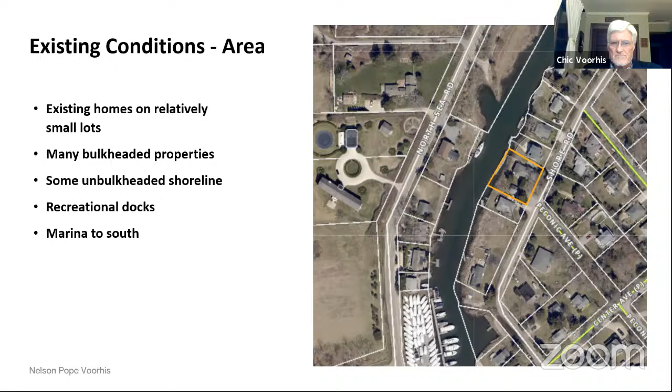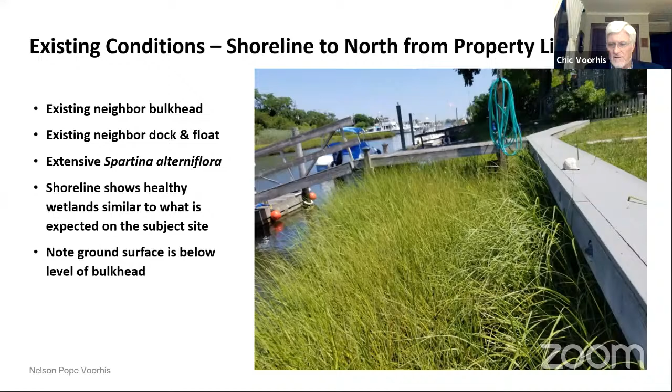The shoreline shows healthy wetlands, and this is similar to what we would look to achieve and look to retain on the subject site. Also you can see that the ground surface is below the level of the bulkhead, which is clearly visible. This is that same property, just looking at it from my client's dock, showing again the extensive wetland vegetation, bulkhead, the recreational boat use by the neighbor to the north, and healthy wetlands.

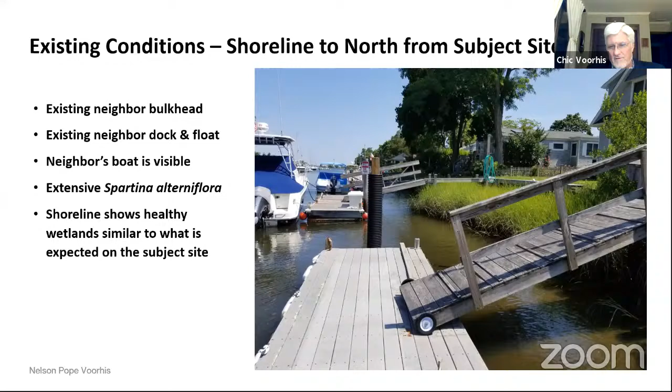This is pretty much the same. It just has a little better view of the existing boat dock that is being used by the neighbor to the north. This image is from the subject property looking north.

And this shows an existing bulkhead. Also Spartina alterniflora right up to the bulkhead. Also a fixed dock, a small ramp, and floats that are used for recreational access. The shoreline is healthy in terms of the stand of tidal marsh, and also the ground surface is below the level of the bulkhead.

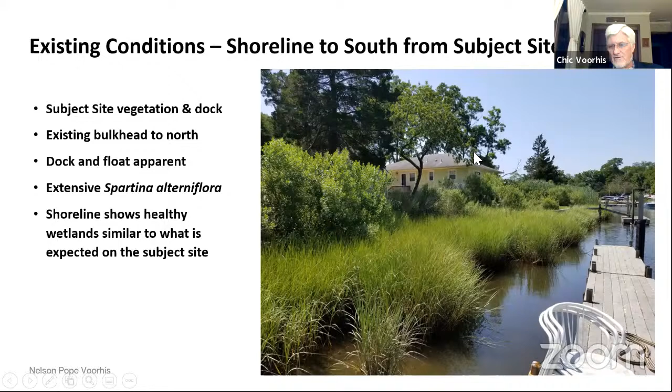This is just another view. It zooms out a little. It's from Mr. Nardi's dock itself, and you can see the bulkhead. You can see the frontage of this subject property, and you can see the recreational pier immediately to the south.

It would retain the existing intertidal wetland vegetation. And as I said before, structures have been addressed through the payment of a penalty through the permit process so far.

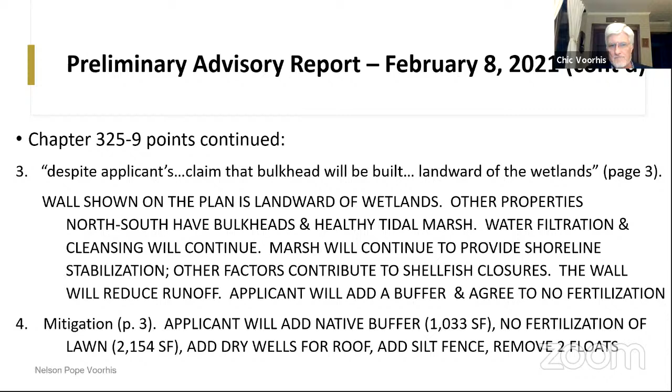On page 4, the advisory report references a pool. I've done this before as well—it's obvious it was a typo left over from another report. So no offense taken, but I just want to clarify for the record that there is no pool proposed with this application.

The next point had to do with the project not being necessary to enjoy or profit from residential use of the site, on page 4 of the report. As I've indicated, both neighbors have bulkheads. The Nardi property is unfairly restricted, in my opinion, and the flooding impedes the use and enjoyment of the property. In terms of profit or economics, the value of the property would be enhanced with a wall.

I'm just looking to address what I saw in the advisory report, and I feel that this is a more accurate characterization of these factors.

On page 4 of the report, it talks about alternatives, and I can tell you, obviously, we've adjourned the hearing a number of times. We have looked at alternatives in this time period. We've looked at FOIL requests. We've looked to improve the project. So my apologies for adjourning.

I do want to tell you that my client does have a cost to raise the house, which would be $94,000 in that range. It's about 1/6 of the purchase price of the home. The proposed project would be about half this cost. So just for comparison, we have looked at those.

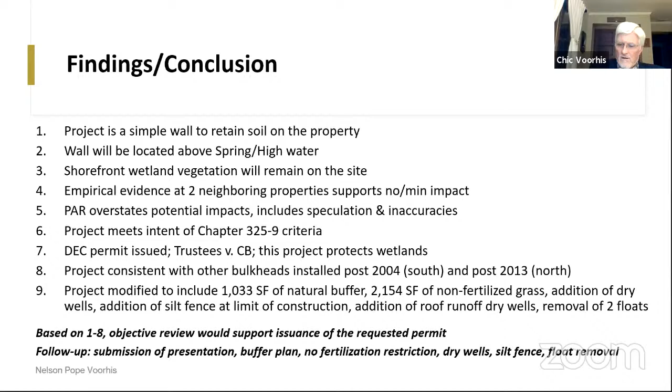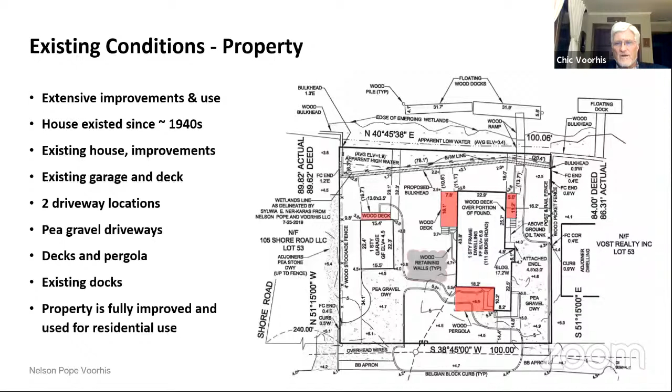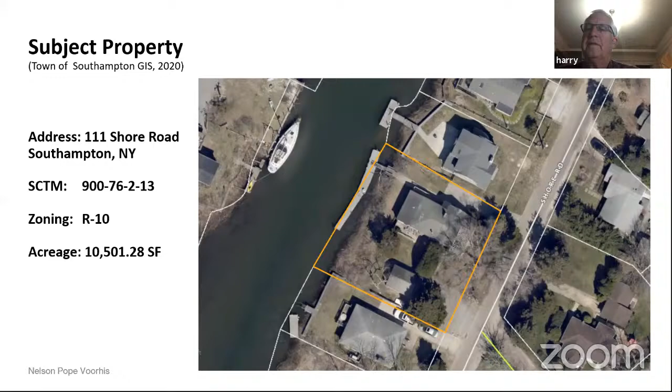Would you put your chart back up on the screen that you showed before, that shows an overhead picture of the property? Certainly. The other one is better because I'm looking for the lines and the location of where you want to put things. Here is the driveway connection to the street. Everything else is shown on this.

So would you talk a little bit about the flooding that your client has experienced on the property? How often is that experienced? Is it cyclical, or occasional? And where does the water come from that floods?

If we can, I'd like to have Mr. Nardi address that. He lives there, his father has lived there, and he is most familiar with it. Mike, are you on? Yes, I'm on. Can everybody hear me? I'm sorry for the technical difficulties.

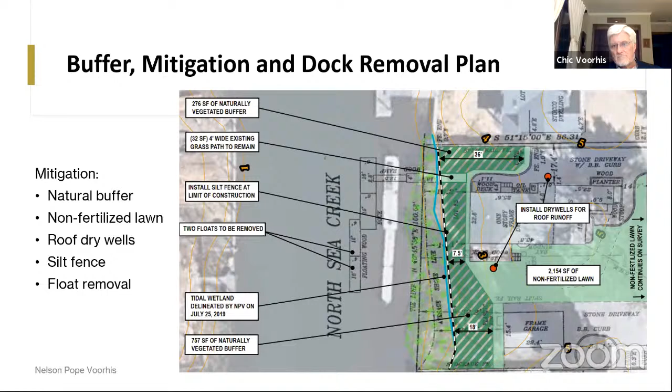So whatever we need to do to solve that, I'm all for it. I want to preserve the environment. I want to preserve the wetlands. I'm not looking, again, to sterilize like they do down in Florida where there's no nature whatsoever. It's just bulkhead after bulkhead. So, you know, we do have a serious problem over there. And when you go up and down the creek, yes, there's certain houses that do not have a bulkhead.

They also may be higher up than this particular property from an elevation perspective. But up and down, I think there's about 32 different properties that have a bulkhead out of the 40 or so that are there. So it's a significant amount of properties that are already bulkheaded, pre-existing, non-conforming obviously, but they do have that protection that this property lacks. And so I could work with Chic to see if there's other things that we can do in moving the bulkhead proposal and things like that. So we could take that as a takeaway.

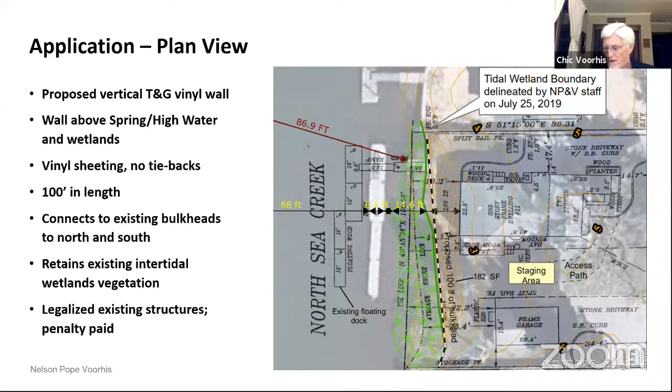We're looking at the current condition, but if you project ahead, I think you can reasonably expect a lot of changes to wetlands on Long Island. It's very disturbing, and there's not a lot of room here for landward migration. So short of removing the house, it's difficult to conceive how protecting this property is going to have that type of impact. Regarding comments about the neighbors, they do have elevated properties, and that's one of the reasons this one is really the weak link, which is why we proposed this. To answer one question, we were looking to establish the bulkhead at a similar height to the neighboring properties. That's all I have to say.

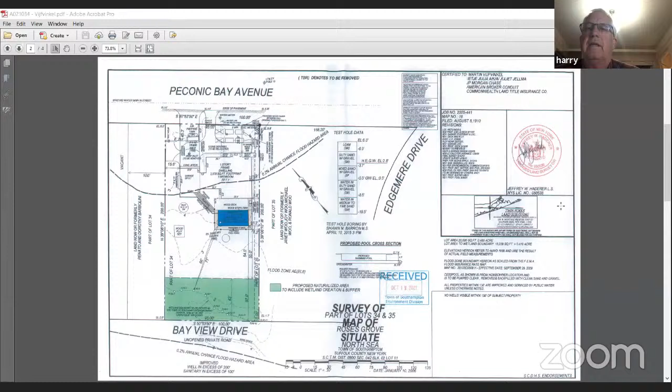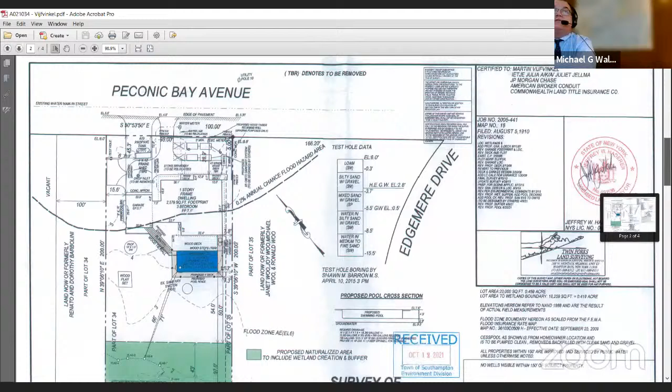My screen is not large enough for me to read all the details on that survey. Would you just explain to the board what the green shaded area represents? If I may, Mr. Chairman, Bruce is the technical guy on this one. If you don't mind, he could come on board and show you what's on this plan. He prepared it.

Good evening. Bruce? Can you hear me? Yes.

Okay, let's go to the plant plan. I'm just going to lay out my exhibits because they're all in one file and it's easier, and I ask you to share the screen. My question, I don't know if you heard it, but I'm going to walk you through the survey, okay.

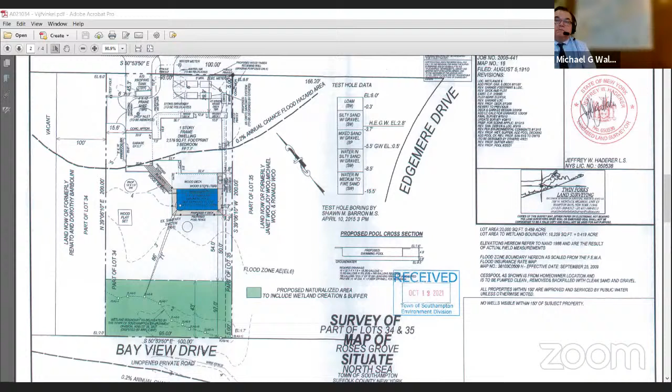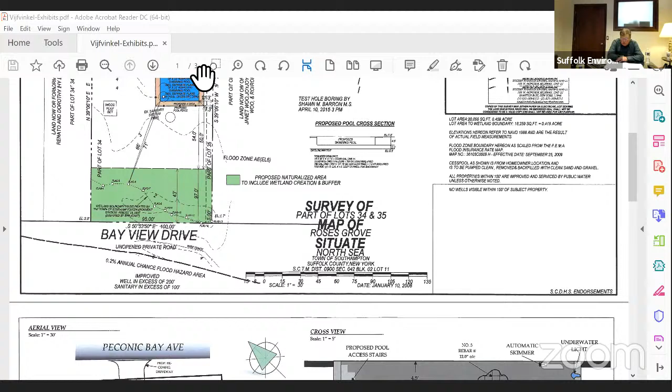Charles, you may share the screen. Thank you. All right, we're going to go to the survey first. This is a survey prepared by Jeffrey Haderer. It is dated...

9/20/21. It was submitted because during our last hearing in July, the chairman requested that we explore rotating the pool 90 degrees, which we have done.

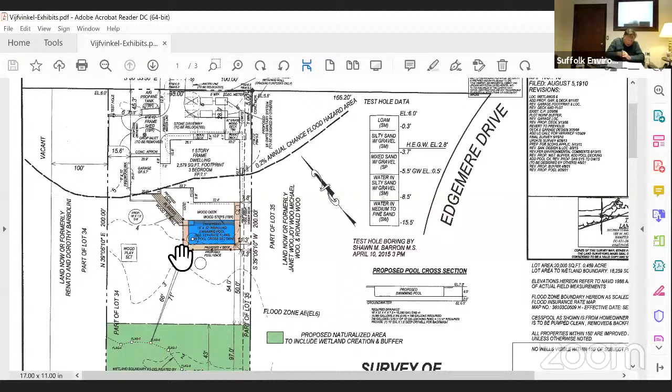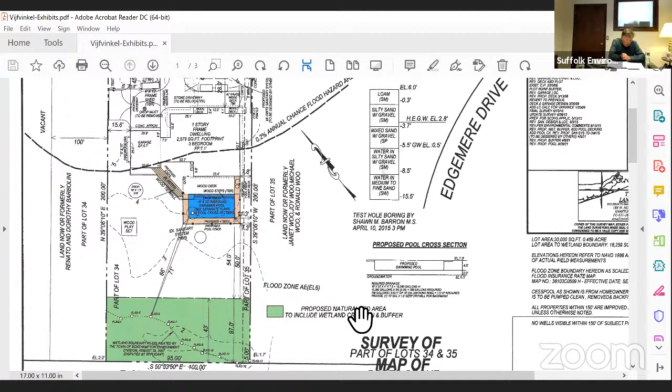The pool is sited 97 feet from the rear lot line, and we intend to take 43 feet of the area of the lot between the rear lot line, which is a town unopened road known as Bay View Drive, forward towards the front by 43 feet. This covers the area of dispute in which we assert there are no wetlands, because the nature of the vegetation is such that one can't classify it as wetlands, nor can one delineate its wetland boundaries. There are mountains of proof to that effect.

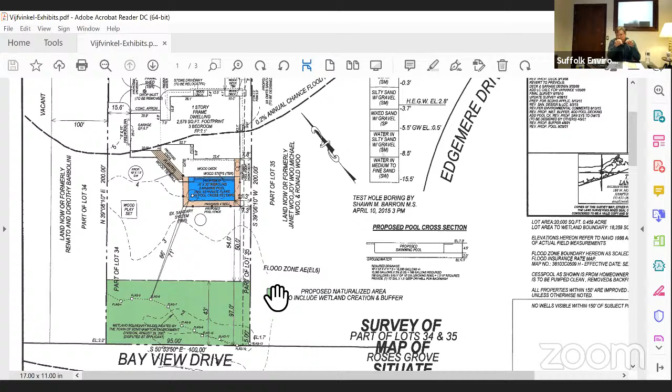If we go to the next screen, please. So this is the basic site plan depicting the same thing, and what you'll see is a proposed revegetated buffer area.

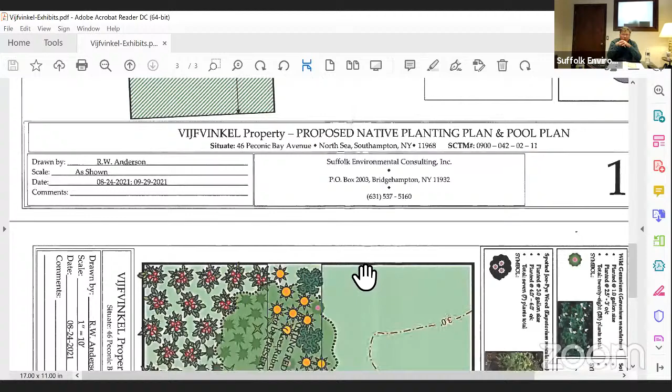And if we shift further down, you'll see this is a planting plan. That planting plan consists of numerous wetland plants, such as blue flag iris, soft rush, Joe Pye weed, swamp rose mallow, but it also contains bayberry, wild geranium, and others. So it's a native mix of planted materials, which the applicant is agreeable to do.

If one were to evaluate this plan versus what's out there today objectively, there would be no question in anyone's mind that this plan is superior to what exists today, because what exists today is, A, uplands, and B, dominated by invasive species, particularly multiflora.

When you consider what's there today, it is almost impossible for the objective reviewer to look at that and, A, consider it a wetland, and B, try to sterilize most of this fellow's backyard, because you're not buffering anything. There's nothing to buffer here. So this is what we've offered.

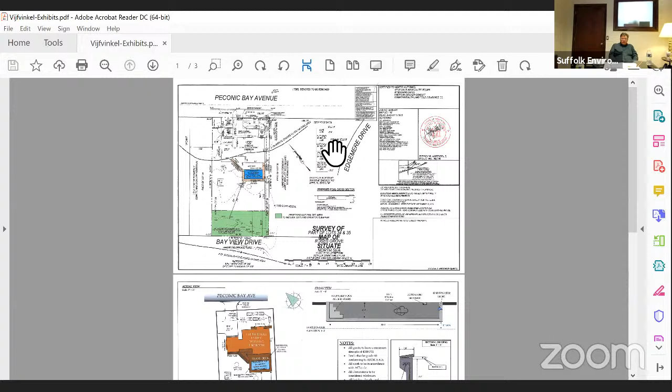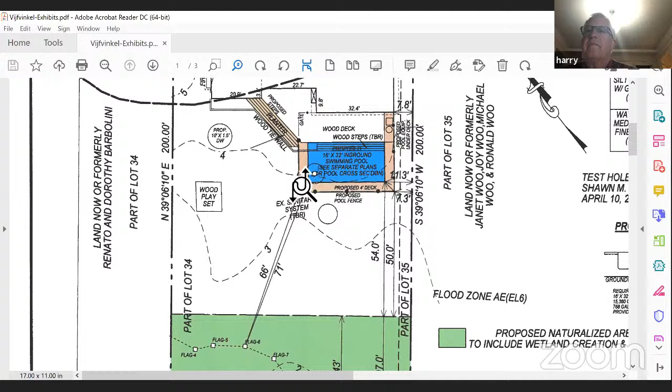So Bruce, would you pan out on this current screen so we can see more of the property? I'd like to see the back of the lot to the deck. Yeah, the original survey that you submitted probably has that. Okay, go back. Hold on. You had it up before. Yeah. There it is. Okay, and zoom in a little bit more if you would. Okay, pan out just a click, one click out. Yeah, that should be good, that's good.

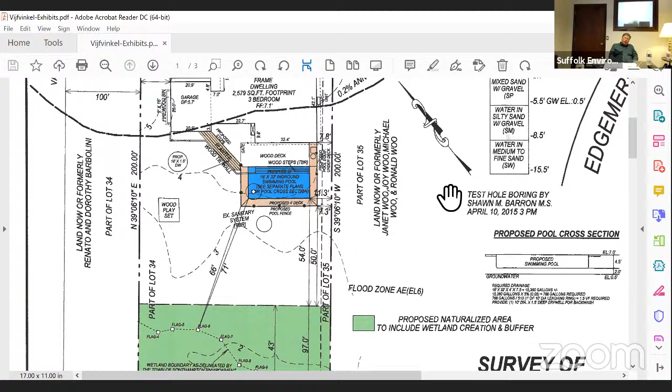So my recollection, as I look at other historical surveys, there are two trees, I guess. Is that what they are? One on the corner of the proposed pool, with a white dot in the middle of it? No, that's the sanitary system. Oh, okay, there's two cesspools, and we would replace those cesspools with an IA OWTS system between the house and the road. And then there's another circle just outside the pool, that's also another cesspool. So I'm using that, not because it's a cesspool, but as an identifier for the space.

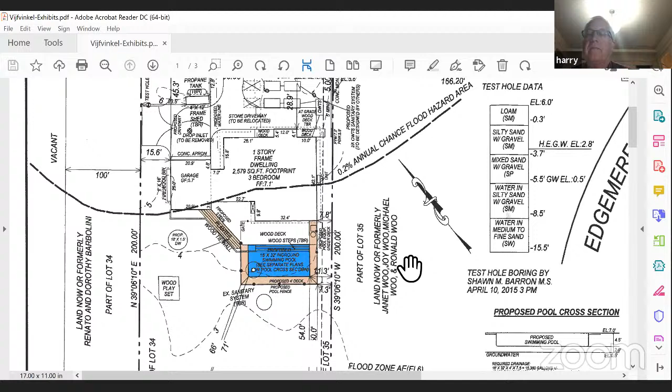The survey that I've looked at before shows that the historical buffer zone extends from just seaward of the more seaward sanitary circle to the wetland line. So to answer your question, Jim, there is a fairly significant amount of space. It's about another 32 feet, basically. So it's currently 32 to 43 to 75. Yeah, that's currently encumbered by a covenant, a non-authorization covenant.

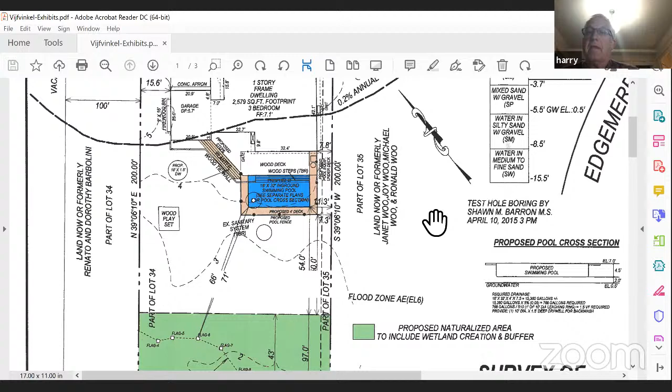Okay, so at this point, Marty, would you speak? Yeah, I'd be happy to. Marty Shea, Chief Environmental Analyst for the town. First, I would offer that the applicant's testimony is a mischaracterization of my intent and my communications with the applicant.

As the applicant well knows, I have been working with them to find a way to issue a permit to construct a swimming pool on this property, and looking to resolve what I see as remaining outstanding issues in order to get to that point.

With regards to the town's determination that there are regulated wetlands on the property, as this board well knows, the applicant had appealed the town's wetland determination and also sought to get the existing covenant deemed null and void through that appeal application. That appeal application went to hearings. My office submitted very significant evidence in support of our finding that there's regulated wetlands on the property. The board considered that evidence and denied the appeal, and found that yes, there are regulated wetlands on the property.

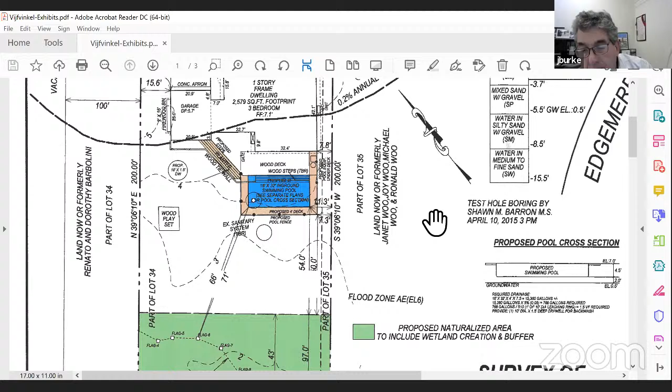My last emailed communications with the applicant regarding the revised plans occurred on October 12th. One second, Marty. Bruce, can you take down the survey so Karina can put up what Marty's referring to? Thank you.

Contrary to the applicant's testimony, I've got my email on the screen right now. I started by saying I'm pleased to see that the swimming pool plans have been modified so that the pool would be oriented west-east rather than north-south, as such alternative design has significantly increased the wetland setbacks for the pool. So number one, I came out in support of their reorientation of the pool.

Consistent with the board's policy for other constrained properties where significantly less wetland construction setbacks are sought for a pool construction, I did ask the applicant to give some thought to reducing the pool width from 16 feet to 14 feet. I didn't say that it's required. I wasn't making a decision on part of the board. I just asked that the applicant give consideration to reducing the width of the pool while retaining the pool in its present location.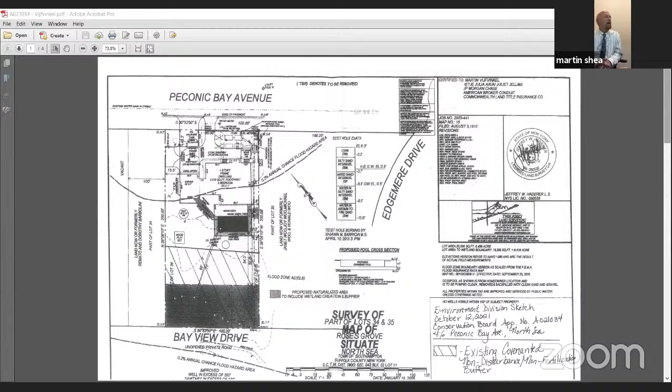Lastly, as I have been requesting since the start of this process, I asked that the survey be revised to continue to show the wetland boundary as defined by the town and to show the full extent of the existing covenanted buffer, and that the applicant amend his revegetation plan in order to restore that area as well.

At the last hearing on this application, I had offered that if the applicant wanted to abandon the proposal for active revegetation and simply leave the wetland and buffering areas in their current state while allowing for natural recovery in the disturbed portions of the wetlands and buffer, that I would be fine with that, and that would significantly reduce the cost of this project for the applicant. The applicant has since indicated that they have...

They want to go forward with an active revegetation plan, which I have indicated support for as long as the applicant adheres to the existing covenanted buffer.

So while I suggested that the applicant give some additional thought to simply reducing the width of the pool from 16 feet to 14 feet, I understand that that's a decision that needs to be made by the board. So that leaves as my only remaining recommendations that the applicant adhere to and comply with the existing covenanted buffer, that it be shown on the survey, and that the applicant make the necessary amendments to the revegetation plan to address the remainder of that buffer.

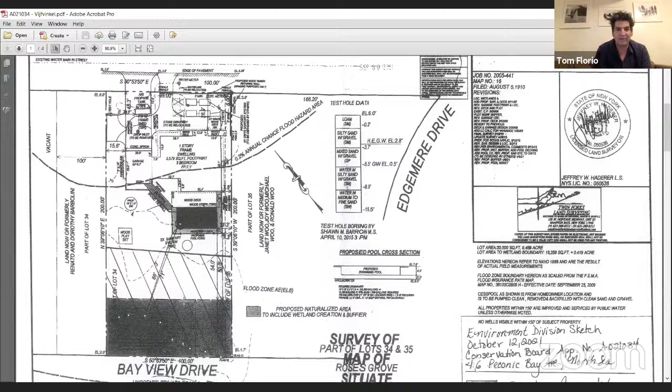Right. Let me say, I want to make it very clear. Once we reached the point where there was a vote denying the letter of no jurisdiction request and a vote denying the right to amend the covenanted area, we went to court and commenced litigation in an attempt to overturn that. We were then invited back to make an application, invited back by Martin Shea.

I think the board would support the amendment of the covenanted area because we're going to put in a new IA system, reorient the pool, and revegetate. So we're not working in a vacuum here. We were invited back to your board to revisit whether the covenant could be amended to give these people a larger backyard.

I want to make that very clear. It wasn't like we got bullheaded and just ignored the actions you had taken. We were invited to come back to go through this process. The goal on both sides was to reach an agreement as to how large the ultimate buffer should be. There was a discussion and understanding that the covenanted area would be amended. That was very clear. I don't want you to think we ignored the board's actions or were trying to be disrespectful or bullheaded.

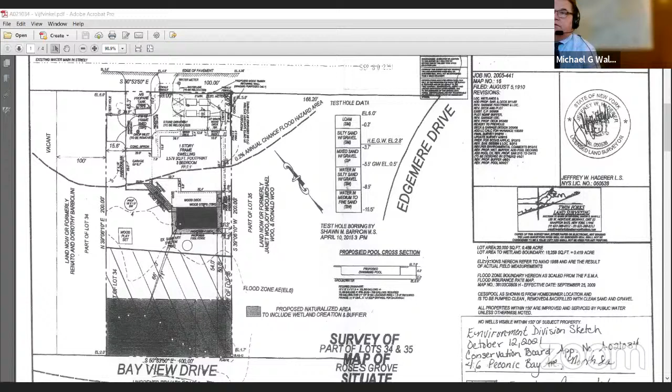All right. Two hours, two hearings.

Next, we're going to do these two together as we started earlier. A 021043 Burnett 2012 Family Trust, A 021044 Burnett 2012 Family Trust. These are very similar neighboring properties, and the information on one should go to the other, so we'll do them simultaneously.

Mr. Chairman, we do have affidavits of posting and mailing for both of these applications. They are in compliance with the town code, and the board does have jurisdiction to open the hearing tonight.

Thank you. Is there someone in the audience for these applications? Inter-Science, and they're in already. Hello. Hello, Jim.

I guarantee I won't take 2 hours. Thank you. Not even 1 hour. You ready, Harry? Yes, go ahead. Present your application, please. Okay.

I discussed this with Marty Shea today. I believe Marty Shea went out to the property. The people have a collection of fences that weren't approved and may not meet zoning. I discussed that with Marty. We did not provide a survey of existing fences, which we will do.

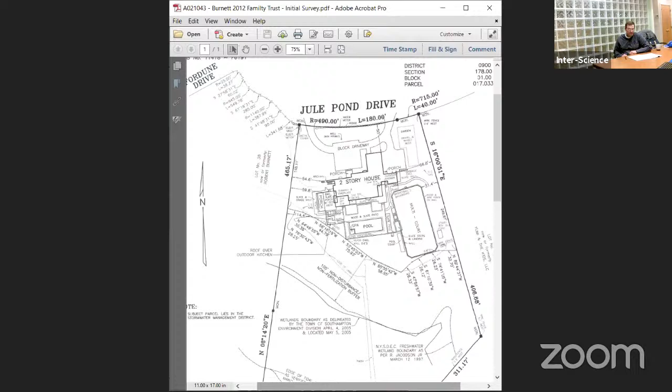After receiving the wetlands permit, we'll apply for a certificate of wetlands compliance, and Marty Shea or Christian Peterson can go out and check our fences and make sure they all comply. Then we would apply for a certificate of compliance at the building department.

This is a piece of property that I've worked on through 3 different owners, and we have a nice wetlands buffer there. The wetlands buffer was done by James C. Grimes Land Design, and I'm particularly happy about the wetlands buffer plants that were installed.

When I went to the site to post the property, that's what I looked at. I did not really notice fences that were not approved or supposed to be there. That's something I should have known about and ordered a survey update to deal with.

But the Conservation Board can simply issue a permit for a new fence and require that all the fences that don't meet zoning and are not authorized by the wetlands permit be removed. That way we can finish this project in short order. That's all I have for the board. Happy to answer any questions you might have.

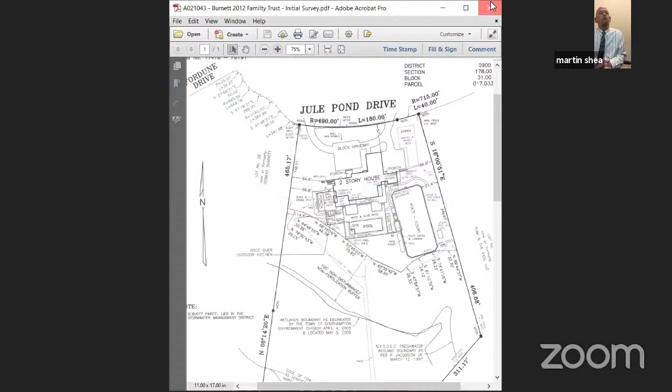Marty Shea, Chief Environmental Analyst for the town: these applications actually take in 2 properties. You're only seeing one of the 2 lots now. The owners of the residence also own the abutting vacant lot to the west.

The applicant had originally come forward with a proposal to install alternative fence types as a deterrent to deer. There was significant concern regarding possible wildlife impacts, so the applicant came back with a second alternative of a different type of fence. There was yet some remaining concern about possible wildlife injury and harm.

So the applicant and I have agreed that the best fencing to go with is a standard vertical 6-foot high fence at 100 feet landward of the wetlands, landward of the existing buffers, with the exception that in the front yard area on the Jule Pond Drive side, if there are any fences deemed to be in the front yard and exceed 6 feet, they would be reduced to 4 feet.

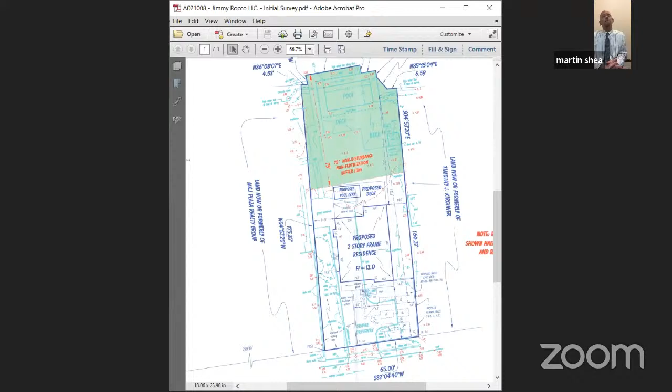This is an application for which we have sufficient information to make a determination, so I'm recommending the hearing requirement be waived. Motion to waive the public hearing. Second? Resolved that the Town Conservation Board hereby waives the public hearing requirement pursuant to Chapter 325, Section 325-80 of the Town Code. All in favor? Harry, aye. Jerry, aye. Tom F, aye. Sunshine, aye, and Tom R.

A021054, 199 Georgian Lane LLC. This application relates to an existing residentially developed property in the hamlet of Watermill that has frontage on Hayground Cove. There is a preliminary advisory report on file dated November 15, 2021.

The residence would be considered small to moderate for the Watermill area. The new residence planned is 3 to 4 times the size of the existing residence. There is a new pool and terrace that would be constructed, while an existing pool and terrace would be removed. There is an existing covenanted buffer on this property, landward of the buffer.

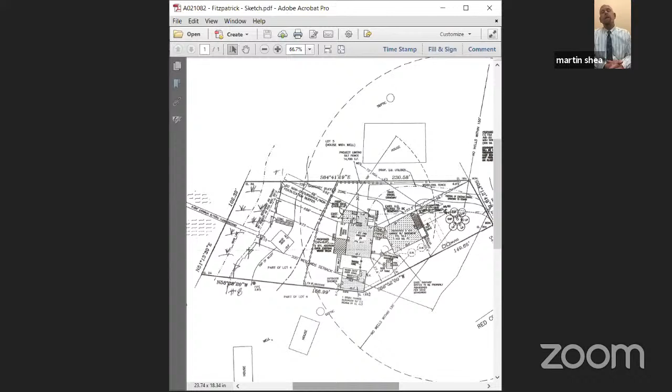I'm supportive of allowing that existing concrete step walkway, as well as the wood deck, to remain on the site. Beyond the required naturally vegetated wetland non-disturbance, non-fertilization buffer, I'm not asking that any other changes be made to the project plans. The applicant is amenable to my mitigation recommendations. As such, we have sufficient information to make a determination on this application.

So the hearing requirement can be waived, consistent with the resolution before you. Motion to waive the public hearing? Second. Resolved that the Town Conservation Board hereby waives the public hearing requirement pursuant to Chapter 325, Section 325-80 of the Town Code.

All in favor? Harry, Aye. Jerry, Aye. Tom F., Aye. Sunshine, Aye. Tom R., Aye.

Resolution, additional modification, A170597, Lawrence Farkas. This is a bulkheaded property on a canal in the hamlet of Remsenburg. There is an existing residence close to the canal where previously we had acted on a conditional approval to allow for certain accessory improvements on the property, conditioned upon the establishment of a covenanted naturally vegetated wetland, non-disturbance, non-fertilization buffer alongside the canal.

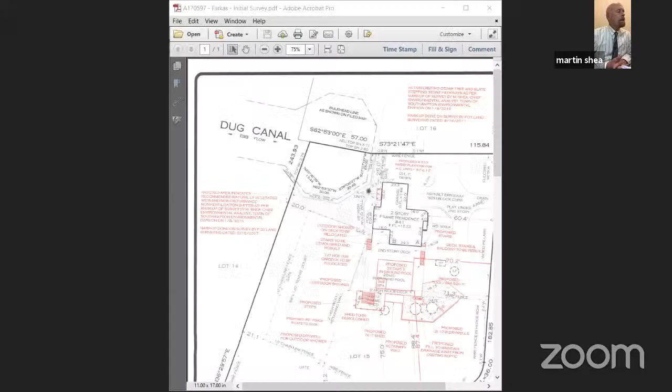The applicant revisited their original plans. The property since sold as well.

The changes to the project plans will shift many of the accessory improvements further away from the water. The only activity that would occur close to the canal involves existing AC units on the water side of the residence, at grade. The applicant needs to construct an elevated platform for those units.

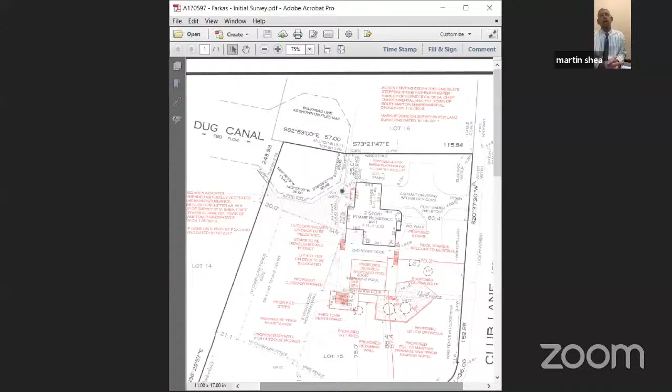Otherwise those units are vulnerable to flood damage, as that low-lying area along the Dug Canal sometimes floods. The applicant is not requesting any changes to the previously required covenanted buffer, and has come forward with an excellent plan for native revegetation of the buffer. The modifications sought to the conditional approval are minor and will not result in any new wetland impacts. I recommend you adopt the resolution to modify the conditional approval and allow the applicant to go forward with these new plans.

Is there a motion? Motion to second, modify. Resolved that a conditional wetland permit approval be granted to Lawrence Farkas and Beth Farkas for the proposed project on the terms and conditions as set forth therein.

All in favor? Harry, aye. Jerry, aye. Tom F, aye. Sunshine, aye. Tom R, aye.

The board had recently issued a permit to allow for certain renovations and improvements to the existing house, including a second floor addition. The applicant is installing an IAOWTS. There is an existing covenanted buffer established pursuant to a prior permit the board had issued, which takes in the land most significant in terms of further reclamation of the existing woodlands on this property.